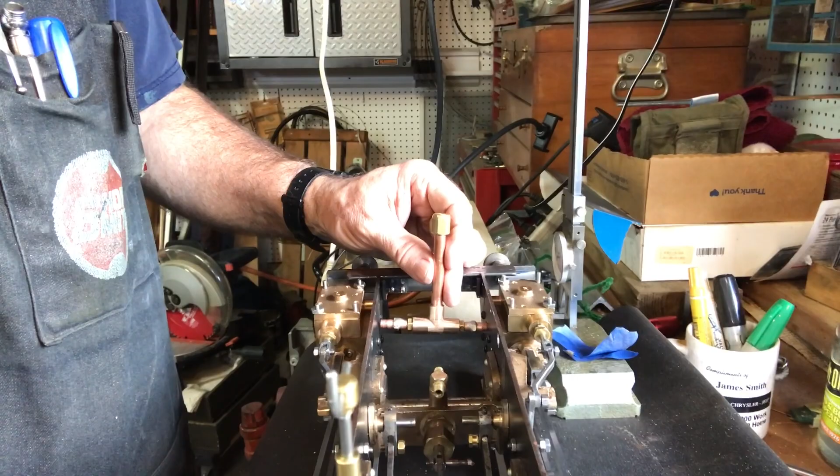In this episode, we're going to cover making the exhaust assembly. It sits in the chassis down here, down low, and it will exhaust the spent steam gases from the cylinders. So stay tuned and hope you enjoy this episode.

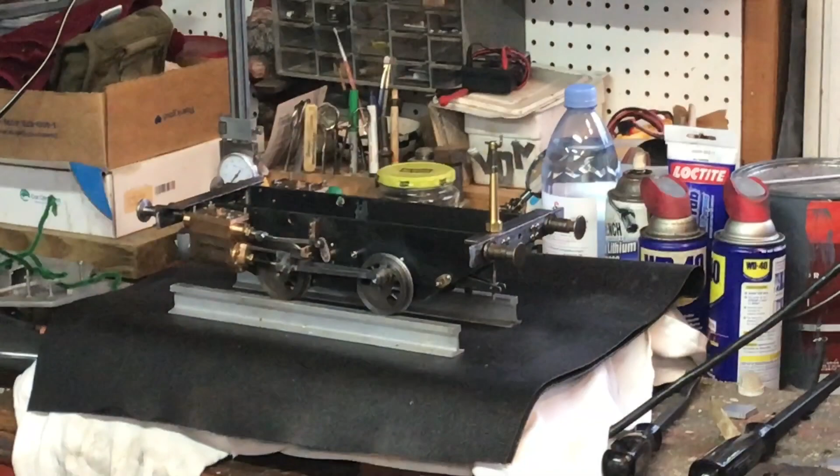There's a little LBSC TICH chassis sitting all by itself over on the big workbench. I put it there so I'll have open spaces here to work on the intake and exhaust pipes in the book, about page 113, 114.

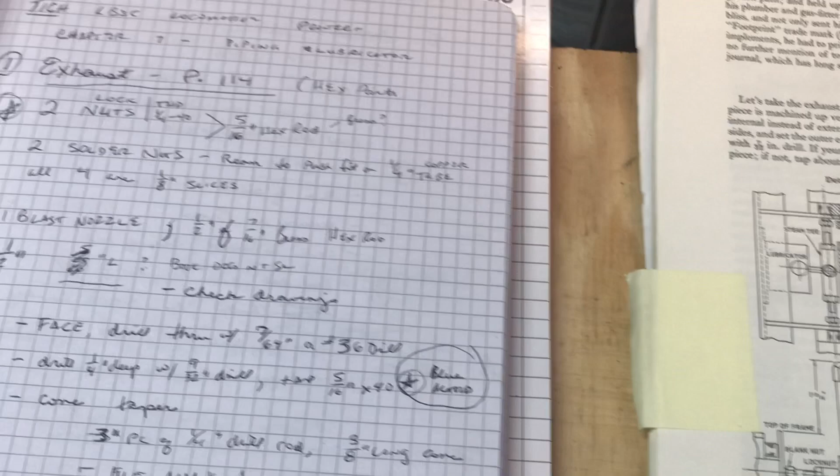I've read through these things and made notes. One of the things, LBSC is fun to read because he's chock full of anecdotes, but one thing I find helpful for me is to just take and write down a step-by-step set of directions.

I've also taken the time to go through and list the taps and dies I'm going to need. A 1/4 by 40 and 5/16 by 40 figure prominently, or 3/16 by 40. I keep these in little Altoids boxes for the ones not part of the bigger set. So there's my 5/16 40, my 3/16 40s, and the 1/4 by 40s I have in a big set, so I just made a note of what set they're in.

Also, here's the little lubricator that I bought off of eBay. We'll be working on that again soon. I've laid out some of the materials, some of the 3/32 inch tubing that'll be for the oil supply. And right here I've got the 5/16 inch thick copper tube that we'll be needing, and underneath here is some of the 1/4 inch thick walled copper that will be part of this project.

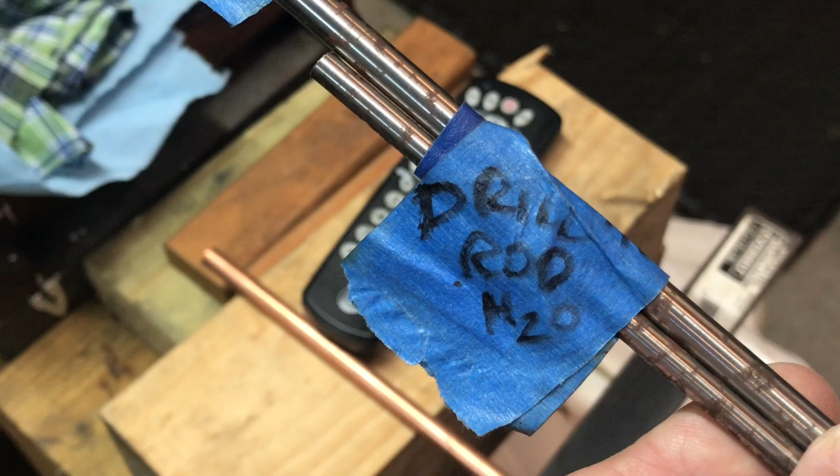Also here, 1/4 inch drill rod that I'll be using, what I always mark as water hardening drill rod. It's impossible to tell the difference between this stuff. I've got 1/4 inch and 3/16, so when I'm using a piece and I'm done with it, I'll save it and put a tag on it so I can easily say, oh yeah, that's what that is, and you don't end up trying to use regular steel for drill rod.

And lastly I found some 5/16 inch hex brass and 7/16 inch hex brass. This will be the exhaust cone. This will be the material for some of the nuts, the lock nuts and so forth on the exhaust pieces. So there we have the basic materials laid out for this part of the project, and very importantly, the casting.

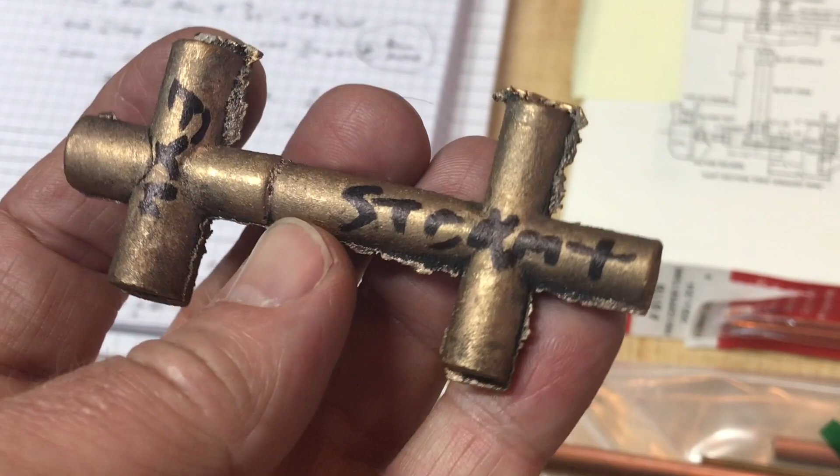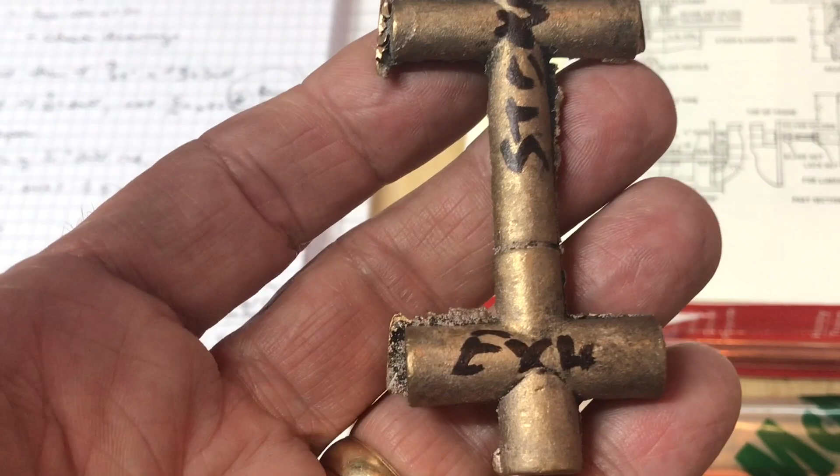I bought this casting, it did not come with the original set, but it's easy to find. I think Blackwell's had this, I'm not for sure, one of the British suppliers, and I bought it when I got the other casting pieces. It was relatively inexpensive and easy to get.

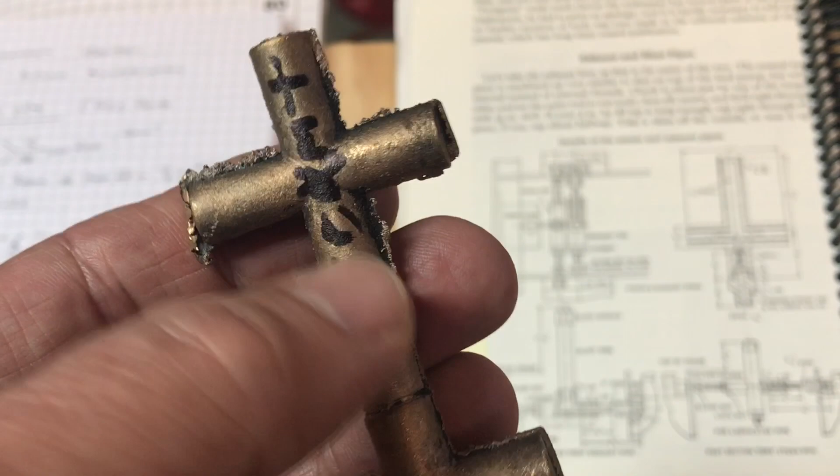The first thing we'll work on is the exhaust, the smaller of the T, and it's pretty straightforward: cutting it, drilling and tapping, and then getting rid of the little tail piece because it's just a chucking piece. But the first thing I'll need to do is put it in a vise and file off the casting flash. That'll be easy to do. Then I'll cut it in half and start machining the exhaust part first, and then the steam supply one second, so kind of break this up.

Probably this weekend, this video will just be all about the exhaust pipe. But can't wait to get started on this. It's just one more step to get it closer to running on air.

Here's a cleaned up casting. I used a file for most of it, and then I hit it with the belt sander quickly to clean up some of the edges. And I think I said like Blackwell's or something, but I believe I actually got this part from Reeves 2000, now that I think about it.

I think I was referring to Black Gates Engineering when I said Blackwell's. Black Gates is the company that Keith Appleton buys a lot of his stuff from, and they may have these castings, but I'm pretty sure I got this from Reeves 2000.

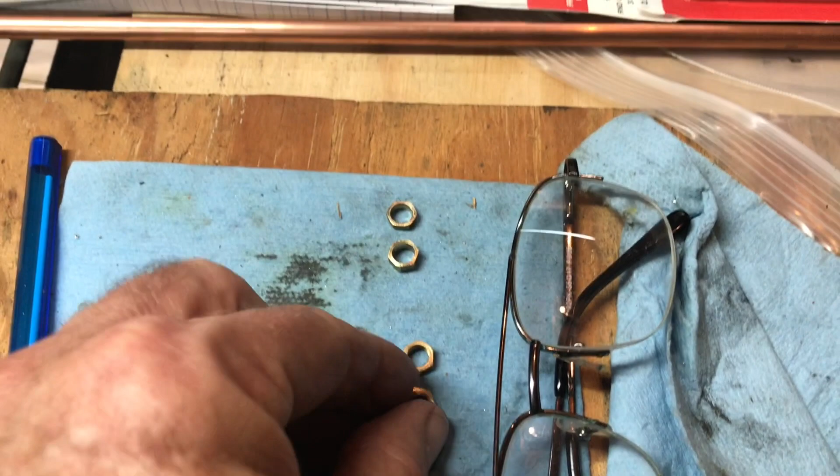So sorry about that. Yesterday I made the little threaded nuts, the lock nuts, and the ones that will be silver soldered on. So I've got them. There's the threaded ones. That'll be the lock nuts for the exhaust passages.

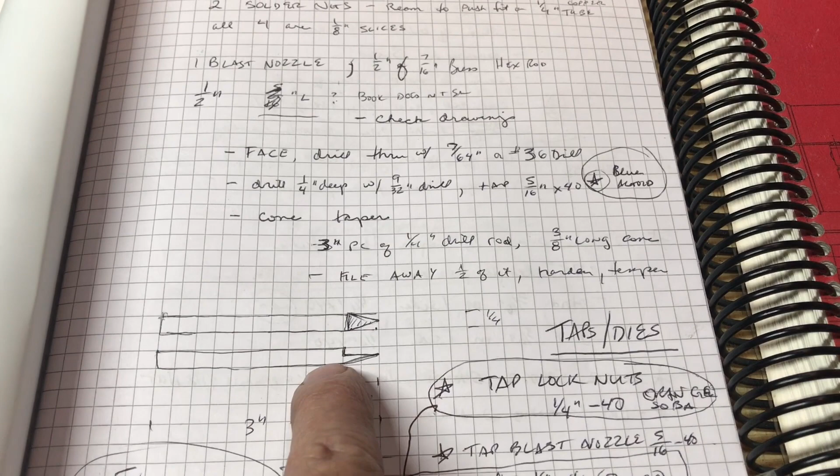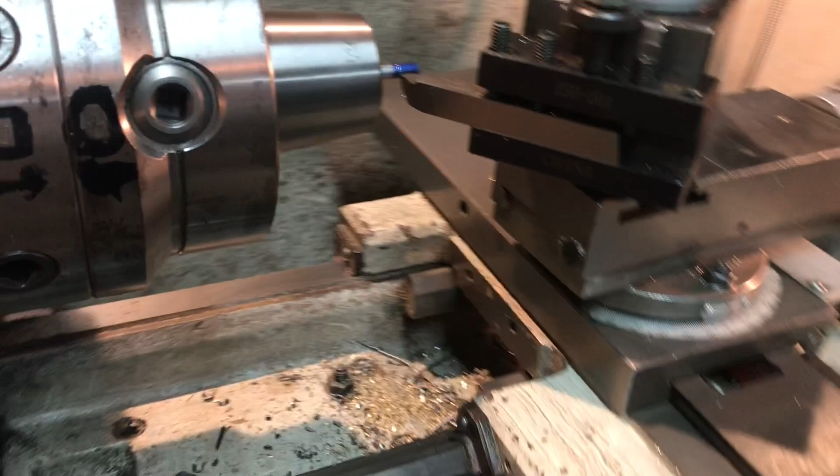And now I'm getting ready to make the cone taper, that cone taper reamer, whatever you want to call it, that they talk about in the book for the exhaust stack. So what I've done, pardon the pan, is cut off a piece of 1/4 inch drill rod, got it in the 5C chuck. I just faced off the end and colored the whole thing with blue.

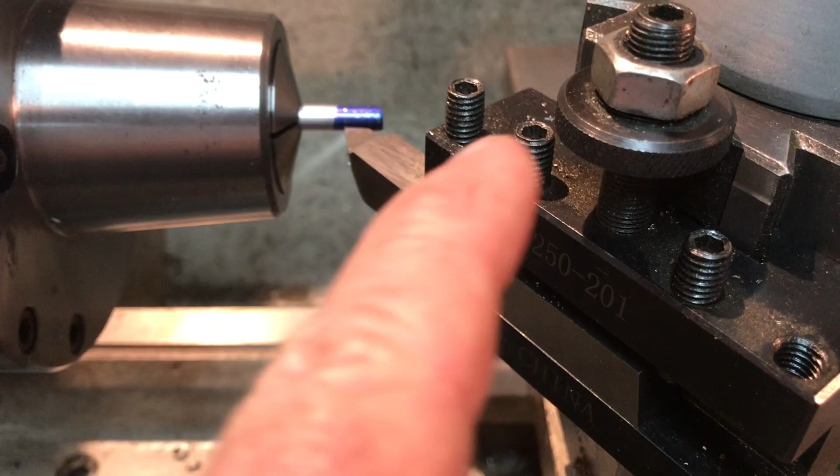I've set it at, I think, 3 degrees, something like that so far. What I'm going to do is just play with the taper, since I know where my center point's going to be and the end point. I can just adjust the angle, the steepness of the angle, which should be pretty obvious, to give me the cone shape that I need.

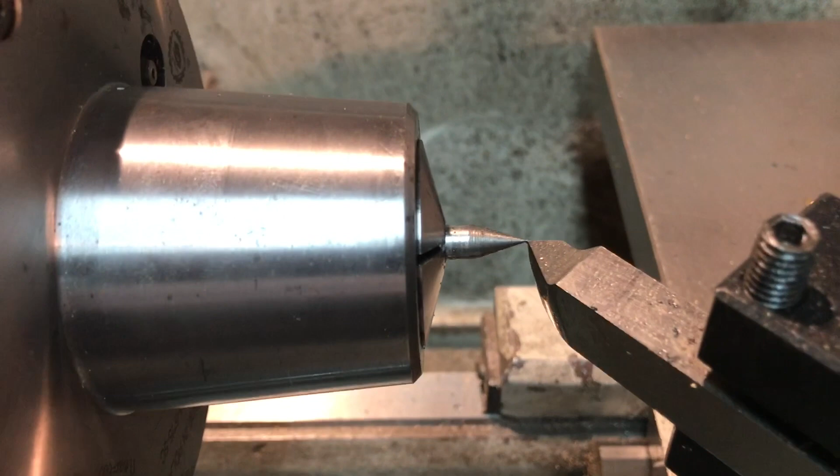So I'll do that and bring you back to show you what I come up with. There's my taper, it's about 18 degrees. I tried 20, but that was a little too shallow. So I ended up with about 18 degrees, and I think that gives me a nice cone point with about 3/8 of an inch of travel there.

So I'm going to file it smooth and take it. The nice thing about the 5C is I can take it over to the mill, put it in a collet block, and mill off the top half. There we go, after just touching it with a file and then some 400 grit sandpaper. It's looking nice and smooth, like the beginning of a cutting tool.

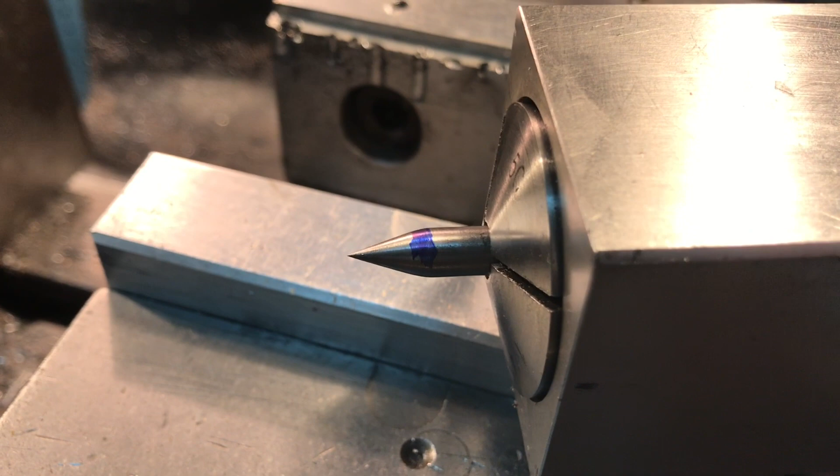Here's our cone blank in the 5C collet chuck, and I marked basically where the end of the 3/8 inch goes. I've got an end mill here, so I thought I'd take a quick video before I stick it in the mill. It'll be harder to see, but I'll put it in and easily use the DRO to touch off the top and go halfway deep. So 1/8 of an inch and 3/8 of an inch in, and we'll be good to go.

Okay, there we go with the top half of it milled away. I hope you can see that. It's funny, it kind of looks like an X-Acto knife from this angle, but we'll go ahead and get it taken out and ready to heat treat.

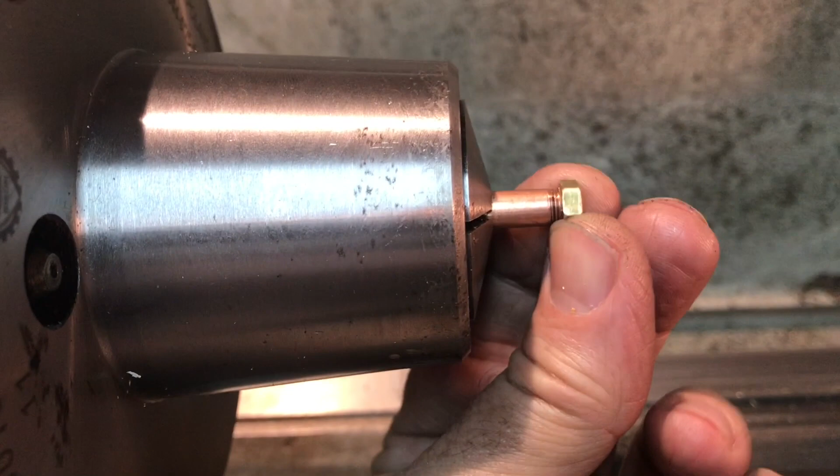And here we have the threaded portion. I put the 1/4 inch copper tube in. I threaded the 3/16 inch portion first since I just wanted to try it. I did it completely by hand using the tailstock die holder, and it came out well. I used the tap paste lubricant, and just as LBSC described, or very similar to it, rotating the thing by hand and going back and forth to cut the chips.

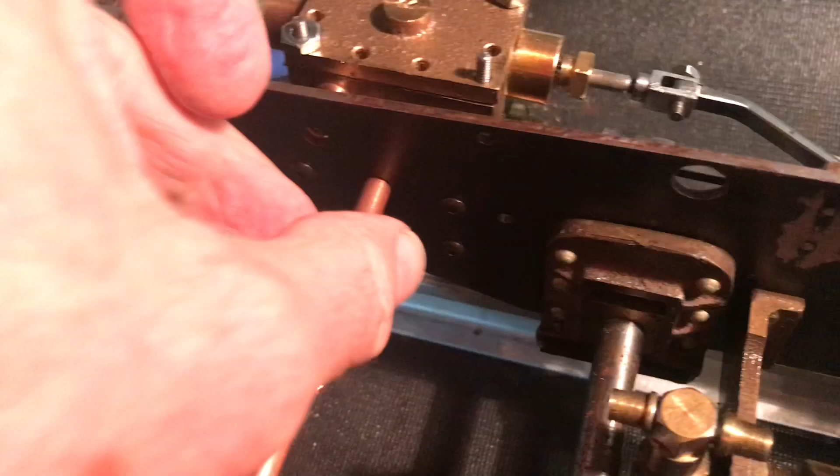Worked out good. Now I just need to cut it off at 1 3/8, reverse it, and thread the longer portion. After I've threaded the little pieces of copper pipe, it occurred to me that I should have checked it a long time ago, the threading on the cylinders for the exhaust, and so that's why I put this in here to test.

And sure enough, they are 1/4 by 40. Let me do a little sneak preview here for you. Here's a little casting tee that's unmachined as yet, but it'll sit right there in the middle, in the center. And happily, yes, these were 1/4 by 40 machined in the cylinders, so I'm pretty happy about that.

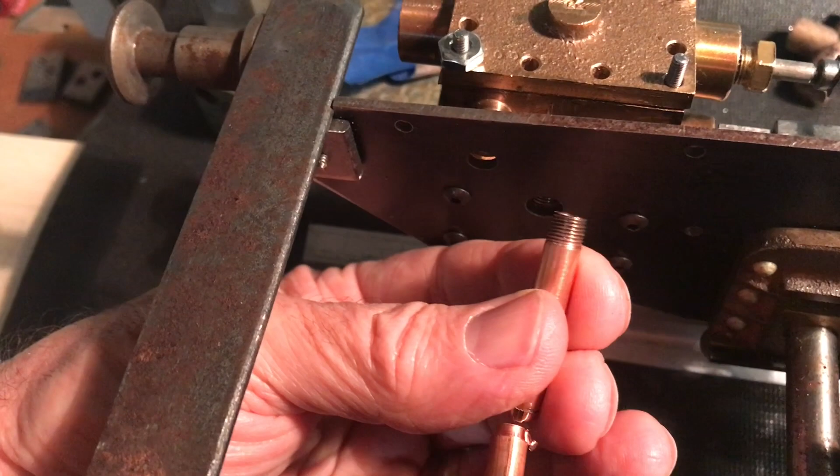Take that all the way out and you can see. So it threads in there nicely. I need to clean up and deburr these ends before I cut myself.

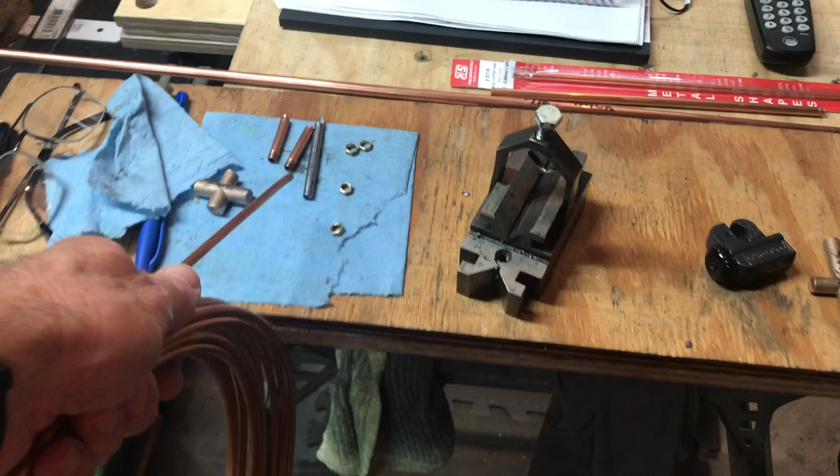And while I'm test fitting things and pointing out about copper tube, these exhaust pieces are 1/4 inch copper. The steam intake are supposed to be 3/16 inch copper, and luckily I have this huge coil of 3/16 inch copper, so I'm going to try to straighten this out.

You know, the pieces only have to be 1 3/8 inches long, so it shouldn't be that hard to get a straight piece. So I've carefully hand unwound a section of it, and I'm going to cut it off with my little baby cutoff thing, and then try to straighten it out with this V-block here.

Here's a little tip I learned from Fred.

I'm now trying to thread the 3/4 inch portion of one of the exhaust pipes. So I put it in, cleaned it up with the cutoff wheel, and then gently filed it, putting a rounded edge so it would be easier to start.

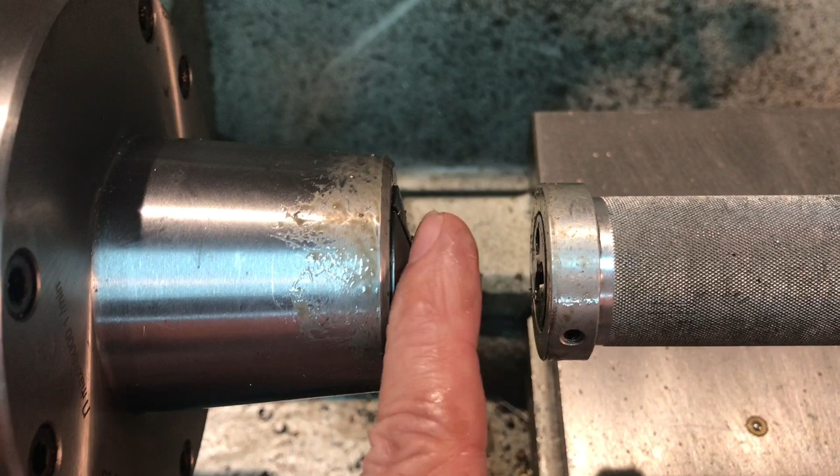Because this is a big, flimsy piece, I only put out about 1/2 inch of it at first and threaded about 3/8 of an inch. Now I'll loosen the 5C collet up again, slide it out some more, and do another section. Not even sure I'm going to try the whole 3/4 at this juncture, but maybe pull it out another 1/8 inch or so, do a little more, restart it, and kind of lather, rinse, repeat, if you understand.

That way, there's the least likelihood of bending off the copper tube in half. Okay, it was painstaking — I did it in smaller increments, but hopefully you can see there's the 3/4 inch threaded section. Came out good. Now I get to do the other side.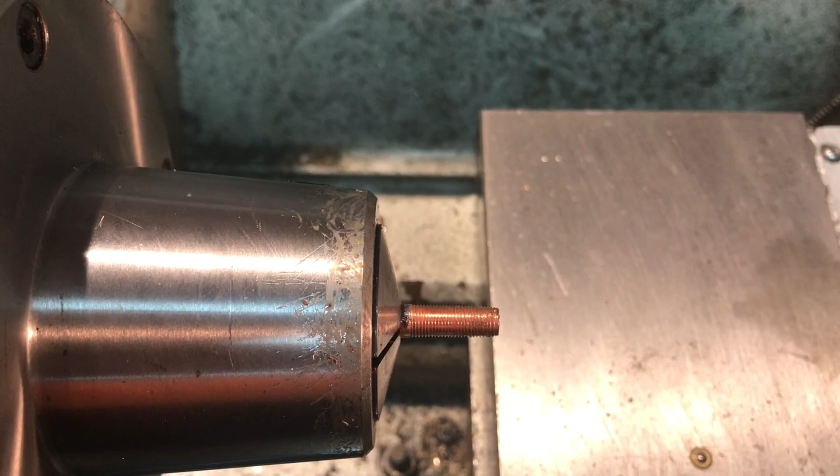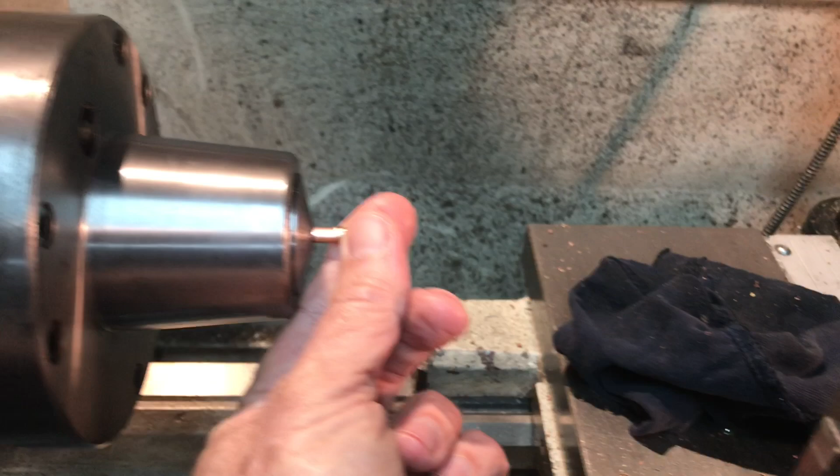Well, I had the setup here for the little pipes. I thought I'd do the 3/16 inch by 40 ones, and this one, even though I straightened it out and only had this much sticking out, was way too soft to thread it this way. So I may have to try to pull it and work harden it a little bit, but before I try that, I thought I'd cut off a section and just try a really small area at a time. Let's see if that'll work.

Well, last night I made a perfectly good 3/16 inch copper steam supply tube, although this portion is not a work of art. It did thread into the cylinders okay, and this part came out really good. And believe it or not, the back side of the one that's in the lathe now is perfect — it's like a whole 3/4 inch length like this. I thought, well, all I've got to do is put this little 3/16 inch thread on like I did last night.

I started to do that, and with the tailstock die holder I caught the tubing at an odd angle and kind of started to squish it. Well, luckily I was turning the thing by hand, so luckily I did back off before I ruined it completely, and I just let it be.

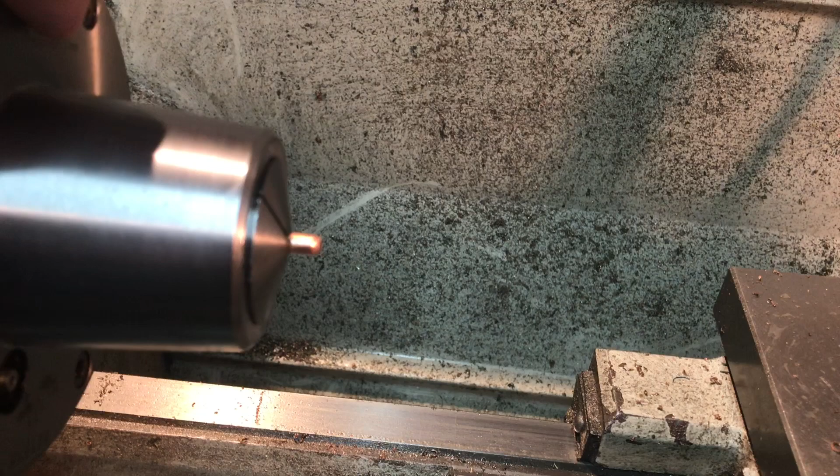But what I'm thinking of tonight is maybe try to massage the copper back into round, take it out and put in an 1/8 inch piece of rod — if I can get it halfway around — super glue it in there, and it'd be stiff enough. So I'm going to try that now.

I'll bring you back and let you know. If not, I do have plenty of the straightened 3/16 inch copper left, and I could always try to make another one.

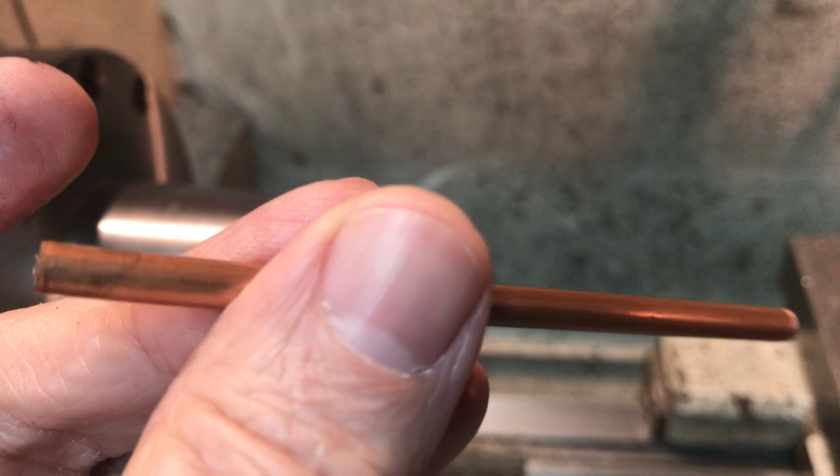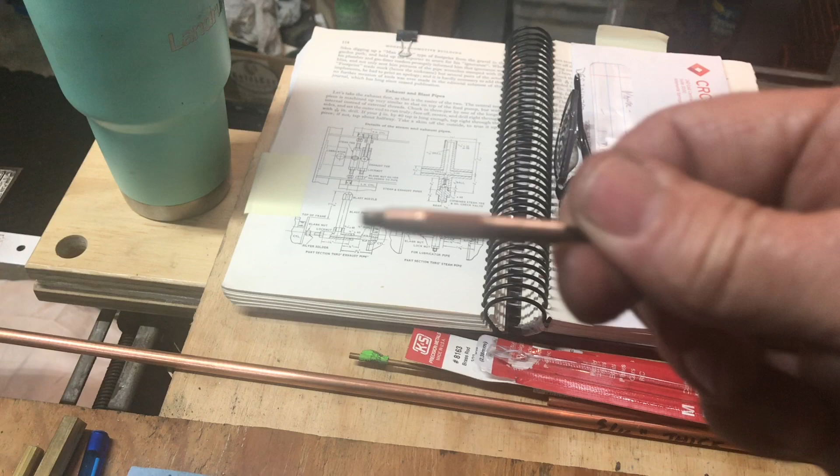Alright, that seemed to work out pretty nicely. I did get the end of it a little bit rounder just by using some pliers, and then I drilled it out just to make sure I had it round inside. And I don't know why it's not focusing.

And then I used crazy glue to glue this drill bit inside, and it made it nice and firm. So I wish I would have done that from the very beginning, use the crazy glue — I wouldn't have to worry about the darn things collapsing.

So now I'll just put this in a vise, protect the drill bit itself, and then heat it up with a heat gun and pull this off with a pair of pliers.

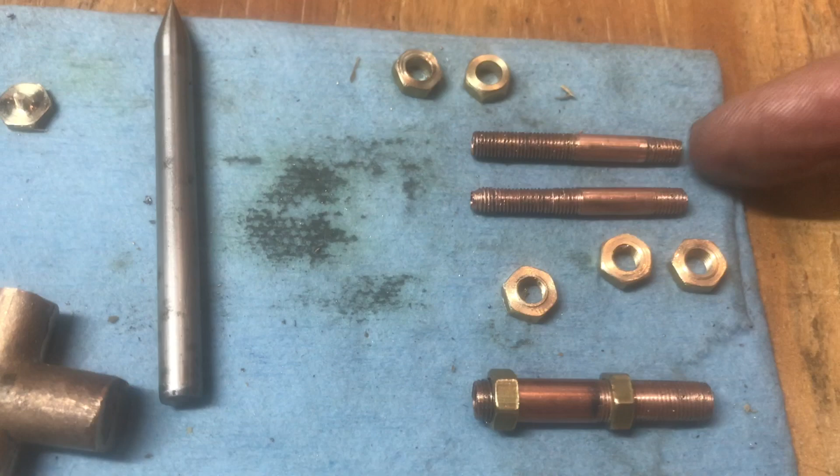Well, the rescue attempt — you can see side by side what I meant by this one here, which is the one I screwed up on this end. Much prettier overall job, especially on the long end. But that trick of crazy gluing in a drill bit to give it stiffness worked perfectly, and I was able to rescue it just fine.

And in fact, I went ahead and drilled out both of them to make sure I used a number drill that's 120 thou, to make sure we had clear passages for each of them.

And while I was at it here tonight on the lathe, I've got the 5/16 inch brass. I made a couple of 3/16 inch smooth bore pieces that can be soldered on, and then I made 3 of the threaded versions of 3/16 40 threaded rods. So I'll be all set just like with this one.

So I think tomorrow night what I'll do is work on the castings, both drilling and tapping them. Pretty straightforward for the exhaust one, and not too much more complicated for the steam intake one.

But I do need to make an oil fitting for the bottom. About to do the last step on the blast nozzle here. Simply followed the directions in the book. Cut a 1/2-inch piece of 7/16 inch brass, drilled the hole through it, and drilled and tapped it for 5/16-40. Just finished that, and now I've chucked up the custom made taper cone to give it the cool blast nozzle sound. I'm getting ready to do that, and then we'll take it out and take a look at it.

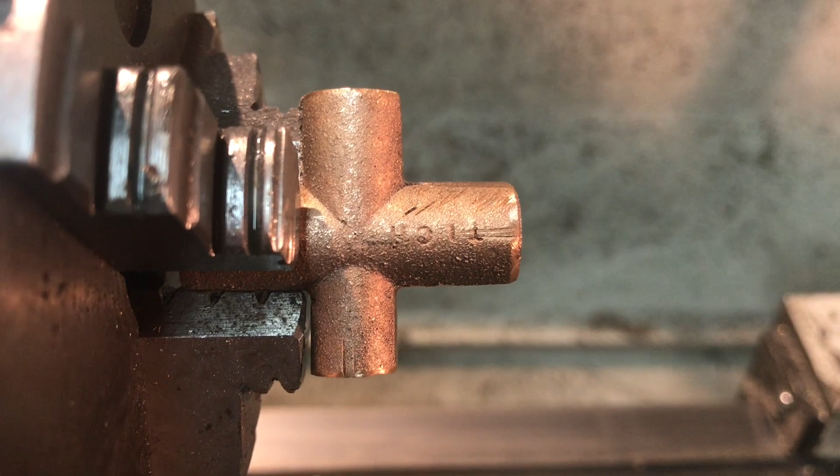Thought I'd take a quick shot of this. This is the exhaust tee, and now comes the fun part after messing about with all the copper tubing and the blast pipe and all that stuff. I'm finally getting ready to machine this, and I thought it was cool how they had stamped 'Titch' on here. So I'm getting ready to face off this side, center drill, drill through, and tap 1/4 x 40, then put it in, use the chucking piece here, and kind of repeat the process except for the 5/16-40 on the top. Pretty simple. And then this is supposed to be removed - I guess I will, I don't know, we'll see. But it's a pretty simple process to finish the base of the exhaust pipe. I'm not going to film all of this, I already have plenty of video, just thought I'd show it, especially with the cool maker's stamp mark there.

Okay, this was fun. There is something about it, if you haven't done it - machining castings, even something simple like this - it just really is fun. And it's kind of cool when they have included the little chucking pieces for you.

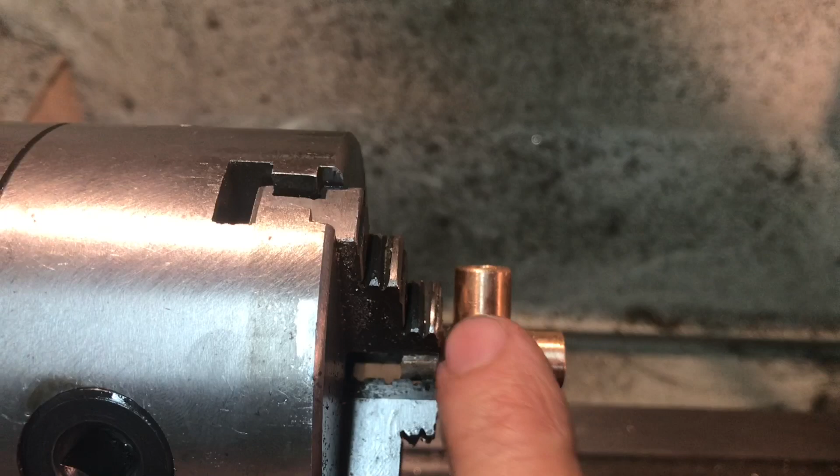So I did it just like LBSC talked about in the book. I did one side and then the other. I drilled all the way through on the first pass, but my tap is not long enough, so I flipped it around. Luckily, that's why I cleaned up one side and then the other, so I would have a good center register, if you will. Then I just cleaned up the outside of this one, drilled it and tapped it for the 5/16-40 for the actual exhaust pipe. And now the only thing left to do - I'd love to leave the chucking piece on for extra weight, but it occurs to me that could be in the way of other things down below the bottom of the locomotive, most notably the oil line that comes from the oil pump to the steam pipes. So I think while I've got it here, I'll just take a hacksaw and hacksaw it off clean, and then I can use the belt sander to round and smooth it.

Okay, here is the completed exhaust assembly, at least dry assembled. I haven't silver soldered the little nuts on yet, but let me show you where it'll go. I was just doing a little test fit, and sure enough it fits fine. What I'm trying to do is get it into that hole on the left hand side. So anyway, there you can see it'll be good, and the size is just right. I'll be able to use these nuts here, the ones that I silver solder on, to tighten the exhaust tubes into place, and then it'll sit like this.

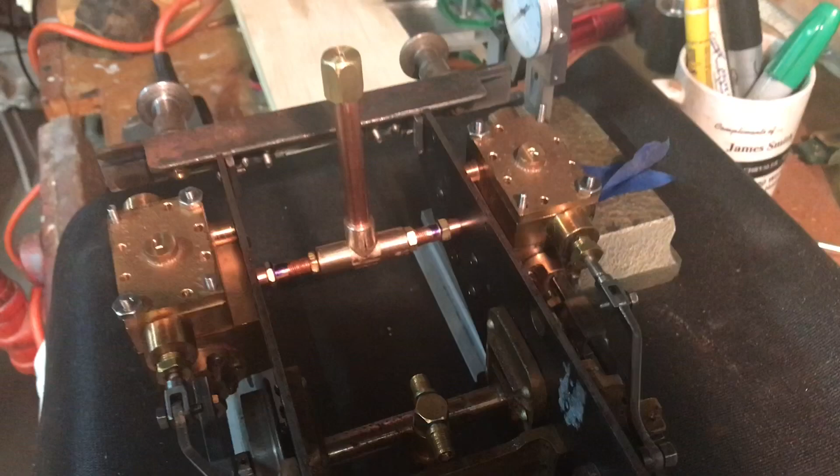So it's kind of late on Saturday night. I'm going to silver solder those tomorrow, and we will wrap up this video then. I'll show you the brief closing sometime tomorrow. Couldn't resist one more shot of the completed assembly - there it is, with the ends extended out and the lock nuts snugged up a little bit.

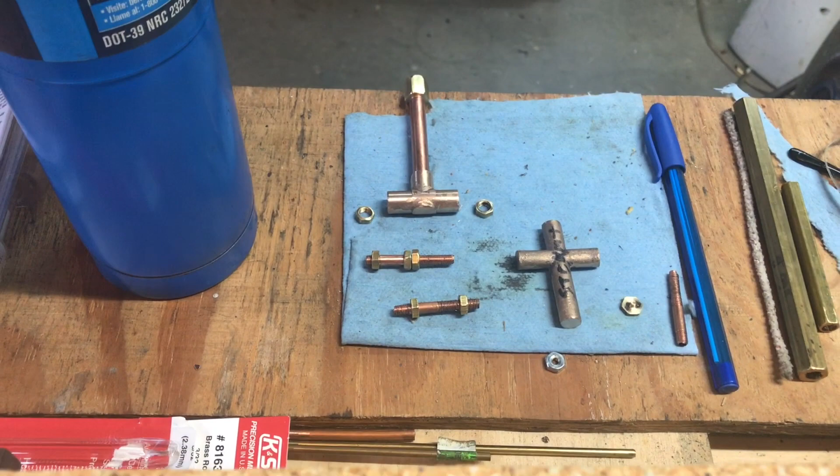Alright, after test fitting it dry, I took the completed assembly apart, set up my little rig, and I've silver soldered the little nuts in place. They look pretty scraggly now, but they're cooling. I literally just finished soldering them a minute ago, so we'll let them cool a little bit, and then we'll dunk them, pickle them, polish them up, and show you the finished product.

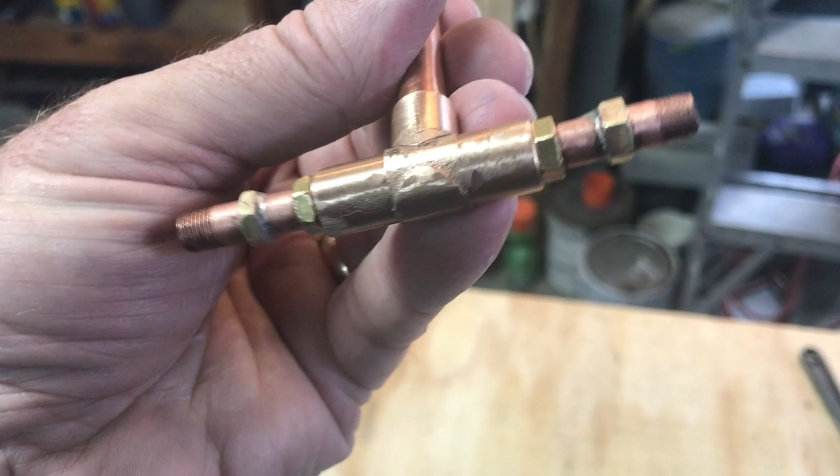Okay, here's the finished exhaust assembly. I kind of used way too much silver solder on there, but I'm quite certain those little nuts are not going anywhere, and we already know it fits inside the chassis, so I'm going to let it sit right here until we get ready to put the whole thing together.